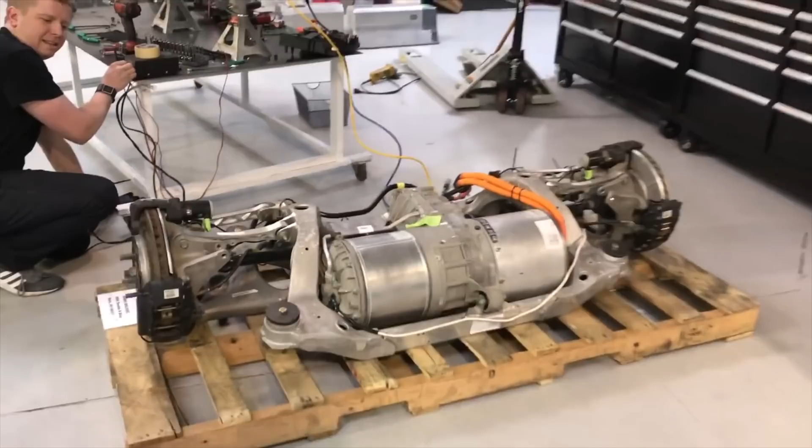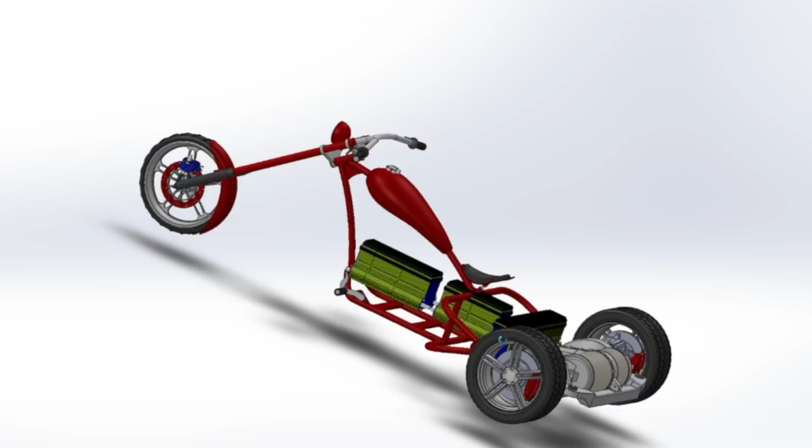This idea was partly inspired by Jim over at Send Cut Send. He built that insane Tesla-powered Honda Accord. This powertrain makes 536 horsepower and it's inside an old Honda that weighs half as much as a Tesla. This got me thinking, why not take that powertrain and stick it into something even lighter? What's the lightest you could go? I think the answer to that question is a Trike. Basically, you take the powertrain, the rear subframe with the motor and suspension, slap a Chevy Volt battery in front of it, and then weld up a frame for a seat in the front of a motorcycle. If power to weight is a good thing, this is the best thing. If safety is a good thing, then this is the worst possible idea. You can vote on this, but keep in mind, it will probably kill me.

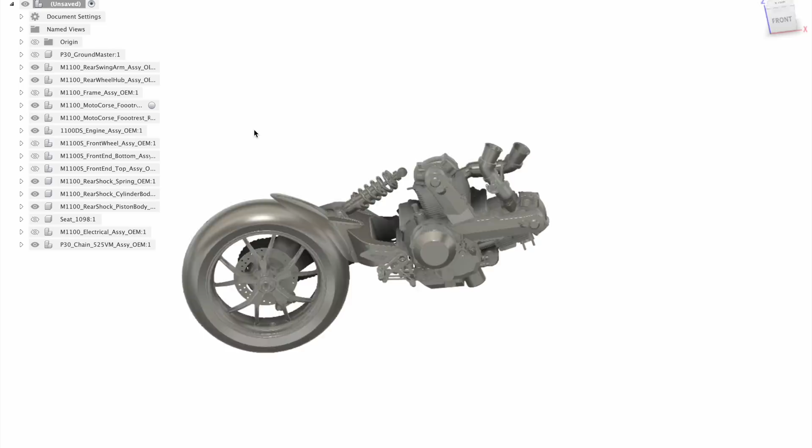Up against the Trike that will definitely kill me is another Trike that will definitely kill me. This idea comes from the fact that Ducati has motorcycles with the rear swing arm coming off of the back of the engine, meaning you don't really need a frame to have a whole powertrain. You could make a cool custom bike with one of these guys, or you could make a cool custom Trike with 2 of these guys. Strap one on either side, weld up some sort of frame in the middle with a motorcycle wheel up front, and you're good to go. The big problem with this is that the 2 powertrains are not connected, and you should have about the same amount of power from both powertrains given the same throttle, but you might have a little bit more from one, or you might have a little bit more traction. This becomes a problem if you wheelie a little bit, which you're definitely going to do.

If you hook up one side, not the other, you are going to spin to the side and go directly into oncoming traffic. You can sync up the transmissions with some linkage and probably a circuit that double checks the gear position on each engine, and you might be able to use some sort of traction control trigger wheel to compare the rotation of each wheel, but I don't know if that's going to be fast enough for internal combustion engines. You could link up the 2 sides at the wheel and add some sort of locking diff maybe. Electric motors would be better at syncing up. This perhaps would be better with 2 Live Wire rear ends, but then you wouldn't be able to use the name Double Duck, which is an excellent name.

When thinking about the possible projects, it occurred to me that instead of buying one big project, I could spend my money on several smaller projects, and then for some reason I thought about buying 10 Smart Cars, and then for some reason the next thing that came up was building a giant Smart Car merry-go-round. Ferris wheel, actually - just 10 cars all welded together in a circle. But you don't actually need 10. The approach and departure angle on these things is so good that you can make this happen with just 4. There are some challenges like spacing them out far enough to be able to see while you're driving, but it's doable. You could drive around and then just slam on the brakes and all of a sudden you're a Ferris wheel.

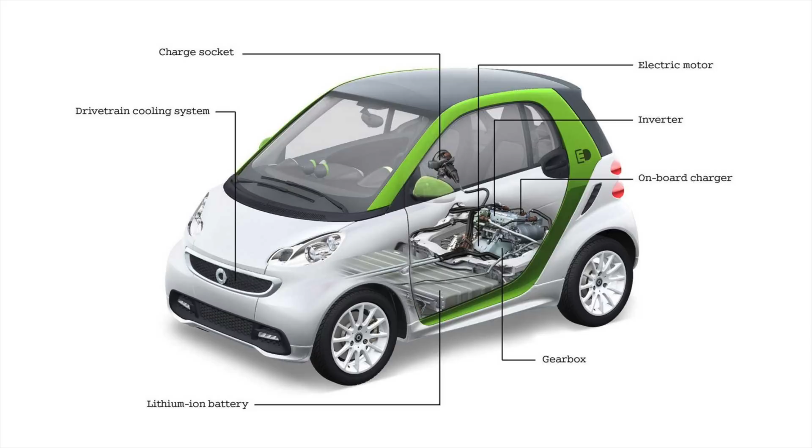You'd probably need the electric Smart for this because, you know, upside down. But funny thing is, they bricked their batteries really easily, so you can actually find these for super cheap. You might be able to have 4 of them in a circle and then just put the battery for all 4 of them right in the middle.

This brings up some interesting legal questions, like would you technically be able to drive around road legally with this? It does have all of the things you need to be road legal, 4 of them actually. But would you need different VIN numbers and insurance and license plates for all 4 of them, or could you just duplicate it? Because only one of them will ever be on the ground driving.

Legal reasons notwithstanding, this is probably the worst idea on the list for a lot of reasons. But I'm putting it up against one of my favorite ideas on the list, an off-road Dodge Viper. Not a Safari Viper, but a full-on off-road Dodge Viper.

Red RT10, the one I had on the poster on my wall when I was just a super small Matt, Gen 1 or 2 specifically. This seems out there, but it makes more sense than it might seem at first.

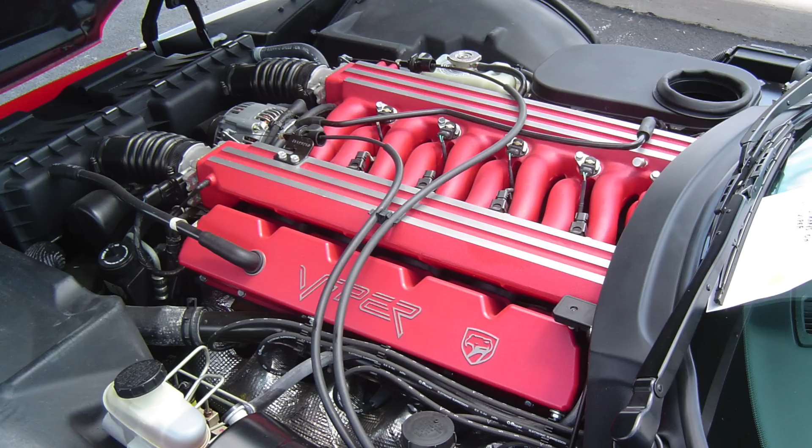See, the Viper is a total truck. It's body on frame, it shares a few parts with Dodge trucks and SUVs, it has massive amounts of torque, it gets horrendous fuel mileage. The brakes are way undersized for any track driving, the cooling system cannot deal with having the car at the limit for any amount of time.

I know Dodge did the Viper Ram, and that's kind of cool, but they definitely should have done this from the factory. This car is absolutely bananas to drive, and to look at.

The only way to make it more cartoony is to lift it up a foot and throw some off-road tires on it. I used to own one of these things and I loved it. It's a great car. It's also a terrible, terrible car. But is it a good truck? Also probably no.

When you think cool cars, you probably don't think hybrids, but I actually think this would be awesome. Take an old Dodge Charger and put a turbine engine with a generator in it. This sounds expensive, and it probably is, but you can actually buy used turbine generators.

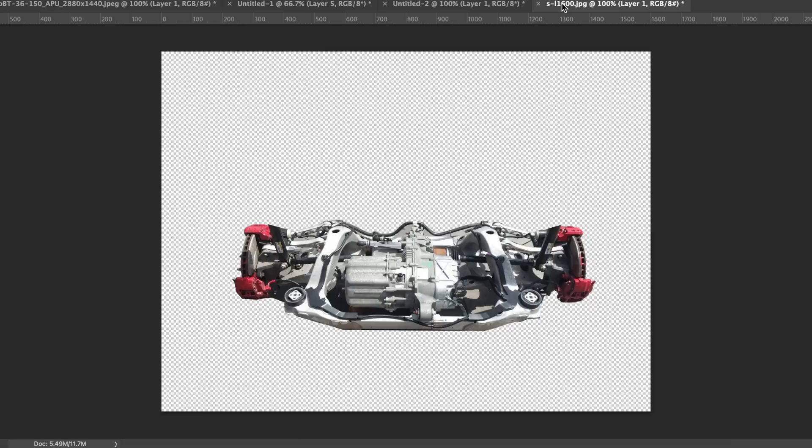They use them for auxiliary power units for airplanes and remote working locations. The idea is you take one of these and stick it under the hood. Then in the back, you throw an electric motor, probably like a Tesla rear drive unit. Put a small plug-in hybrid battery in there, and you have a fast EV that can also fill up at any gas station. Actually, depending on the turbine, you could probably run it on tequila if you wanted to.

Ariel of Ariel Atom fame is working on a turbine-powered series hybrid supercar. I probably can't afford to do this, but I think if you got a major car company and started to mass produce these things, you could make it reasonably priced.

For instance, a Dodge Charger. Why the Charger? Because Dodge should be doing this in production. They've got their Charger EV concept with the fake engine noise and some weird fake transmission shifting. This is stupid. Dodge is trying to make a cool EV, but they're going about it the wrong way.

Imagine you pull up to the stoplights and next to you pulls up a silent Dodge Charger, and then you hear a turbine engine spooling up. This is super cool, and I don't want to do it, but Dodge definitely should.

Up against the turbine Charger is the Hell & Country. I had this idea back when I owned a Town & Country. Chrysler has shoved their 700 plus horsepower engine into just about everything, but they never put it into a minivan, which is a crime. They really should have done this from the factory, just like the last two things I talked about.

In fact, Chrysler should just put me in charge of product planning. I know minivans aren't cool, but the only reason they're not cool is because nobody has just owned it. Hybrid minivans? Meh. 700 horsepower minivan?

Definitely. Tavarish is supposed to be building a Hellcat Chrysler Pacifica, which I'm very much looking forward to. It's not technically a Hell & Country since it's a Pacifica, but it will have 1200 horsepower, which is, dare I say, too much? Or just right? I should probably leave this up to Freddie to figure out.

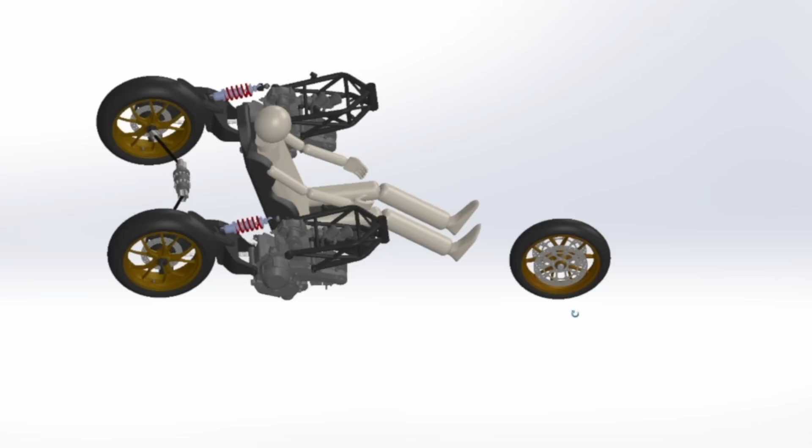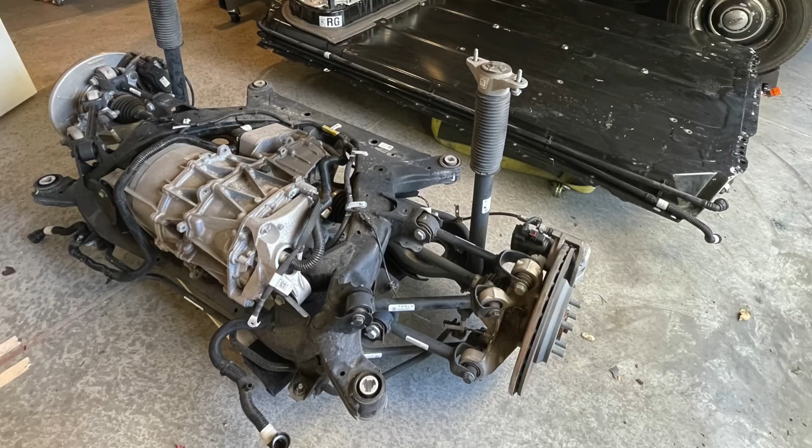That one uses plug-in hybrid batteries because they can discharge a lot of power. I don't know the specs on the new plug-in Prius, but let's assume the battery is 400 volts and can discharge 15C, which isn't unusual for a plug-in hybrid. With that, you should be able to power a Tesla Model 3 rear drive unit at full beans. Combine that with the front Prius internal combustion engine, and you have a 500 horsepower all-wheel drive Prius.

Slap a wing on the back, take it to the track, and make the Honda Type R crowd second guess all their life choices. Toyota should really put me in charge of product planning.

Ford could also benefit from the vivid imagination of Superfast Matt. See, I would love a Bronco Raptor, but here's the deal: it's too wide, just stupid wide. I know it's made for blasting through sand washes, and I do love that part of off-roading, but I encounter a lot of narrow passages or rocks jutting out into the trail. I want a Bronco Raptor, but I really don't want the trade-offs for the width and the low-speed stuff.

So why don't we just shove that 400 horsepower 3-liter into a Badlands? More power, more towing capacity, but it can still crawl through the narrows. Back before the Bronco Raptor came out, there were rumors it was going to be sold under the Warthog name. Well, I think they should use the Warthog name for this vehicle.

This is a no-brainer for Ford. This is a parts bin vehicle—you just take a bunch of stuff you already have and shove it together. The development cost for this thing would be less than the cost of one of them. Unfortunately, it would cost me a whole lot to make, so please don't vote for this one.

Amphibious car or amphibious motorcycle. You decide.

So assuming I don't buy 3 more smart cars and turn them into a giant smarty-go-round, I am looking for a reason to write off my smart car, and I think a really interesting way to do that would be to turn it into a giant RC car—actually, the smallest giant RC car. Smart cars came with an electrically assisted steering rack, which might be enough to steer the car on its own.

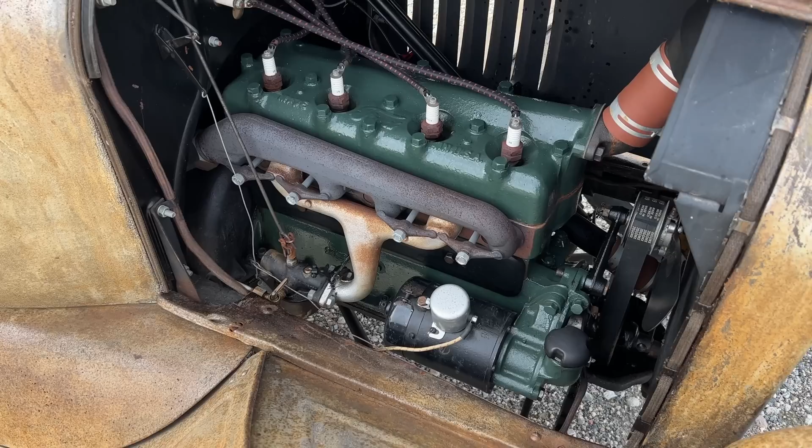But I do think there are some things you can do about this, like the wheels, for instance. They're wood, but you just need to CNC out some new ones out of aluminum and then paint them. Throw some motorcycle tires and brakes on there, and you're good to go. We can hide a steel roll cage inside the body, replacing the wood structure. The high center of mass might be a problem, so we'd have to do something with active suspension. This would get pretty involved.

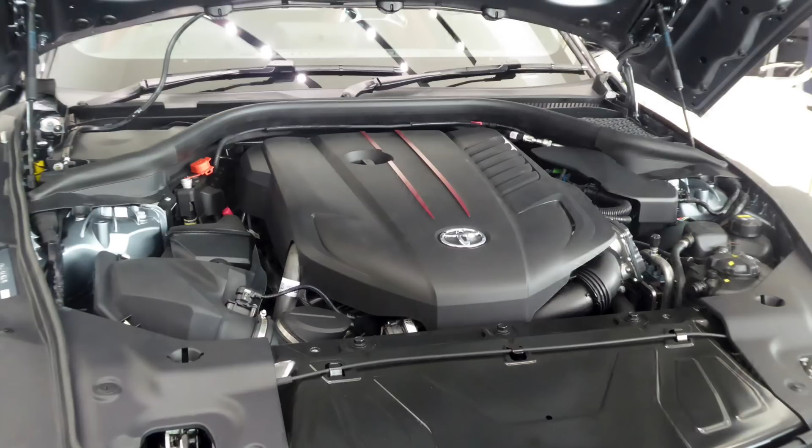Basically, we're building a full custom race car, and if I'm building a full custom race car, I'd rather build an XK120 race car. I love the XK120, it's such a great looking car, and the overhead cam inline 6 is pretty cool, but I bet we can find one without an engine that's just begging for a turbocharged inline 6 with 500 horsepower. There are a few options available: the Supra, the M3 Competition, the S500. Some side pipes, a roll cage, maybe a wing, some obnoxious fender flares. This would be amazing. I wish I could afford to build it.

Some of you have been screaming at your screen for the last 10 minutes that I should just finish the projects I've already started, and I have a lot. The Honda is mostly finished, but I've always wanted to make door cards and a carbon fiber roof for it. The Jag still needs some suspension, controls, and bodywork. The land speed car needs a whole body, and I'm not really looking forward to that. I have this giant scooter thing that's been 80% finished for like 3 years. I still need to tune the Grom. This is probably the most responsible thing to do, but also the least fun. But since I know I'm going to get tons of comments telling me that I should just finish the projects I already have, I'm going to put it on the list.

Going up against this is, I don't know, a ham sandwich.